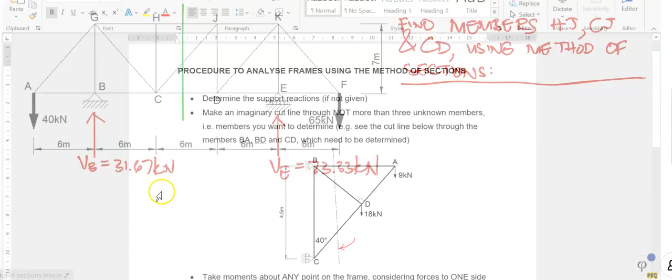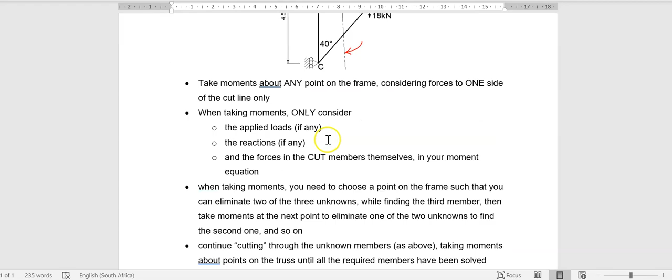Right. So what's the procedure? I'm referring to the procedure again. There's the procedure, if you get stuck. So for every member I'm going to solve, this is the procedure you go through. So what's the first part of the procedure? I'm going to assume HJ, CJ, and CD to be tension or compression. I am going to assume that HJ is in compression, and I'm going to assume CD to be in tension.

Now notice there, I'm drawing my arrows on the right side of the cut line only, because I'm going to consider forces to the right side only, so I don't confuse myself. And notice I'm only considering one end of the member. Don't put your arrows in on both sides of the member, on one side only. I'm going to consider forces on the right side of the cut line only, so I'm making my assumptions to the right of that cut line. If you put it on both sides, you will confuse yourself and get it wrong. So that's compression, that's tension, and I'm going to say that CJ is in tension as well.

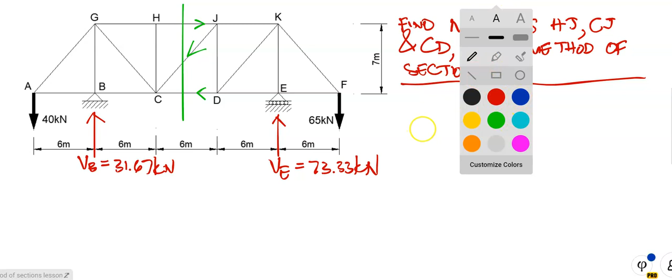So I am going to take moments about any point on the truss, considering forces to one side of the cut line only. So we need to take moments about the point which is going to eliminate 2 and find the third one. So I'm going to take moments about J for the start. So at joint J, I'm taking moments about this, considering forces to the right side of the cut there. So it's going to be plus 65. What's the lever arm for that one? It is 12 meters.

Minus 73.33 times 6. That's out of the equation. That's out of the equation. And that is in the equation. That will be plus because it's clockwise with respect to J. So it's plus CD. What's the lever arm? The lever arm for that force actually is the length of member JD, which is 7. Oh, that's an easy one. Are there any more? There's no more. Is equal to 0. Now remember the rules.

Remember the rules. Take moments about any point on the truss, considering forces to the one side of the cut line only. Only consider the applied loads, the reactions, and the forces in the members themselves. I'm not concerned with JK, DK, DE. So therefore, I'm going to write it here. So I'm going to say therefore CD is equal to, do the calculation yourself and check me out.

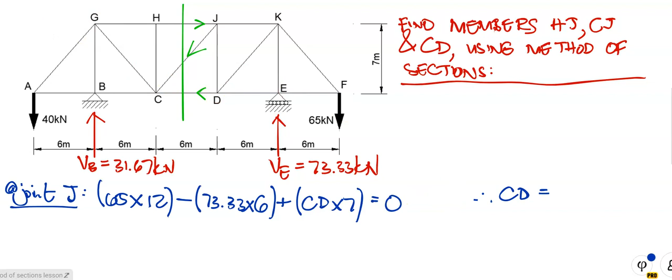And I got CD equal to, very important, minus 48.57. What does the minus sign mean? The minus sign means that CD is not in tension, it is actually in compression. So I'm going to change it. So it's actually doing that, and it's doing that. And I put both arrows in to tell myself I'm done with that one. So it is in compression. If you got that right like that, good start.

Right. I need to take moments about another point to determine either HJ or CD. I'm going to take moments about D. So I'm saying at joint D.

People, you can take the joints in any order. You can take moments where you want to, but I'm just happy to take it there. Okay, so if I take moments about D, is that going to be right? No, it's not going to be right. That's a bad choice. Why? Because CJ and HJ will be unknowns in my equation, so that's wrong. I shouldn't have taken that.

I'm going to take joint C rather. Yeah, that's a better one. Well, I'm taking moments about joint C, so that's out. I can determine HJ. So I'm taking moments about C, considering forces to the right side of the cut line there. Right, so let's see about C. HJ is going to be positive. So it's HJ

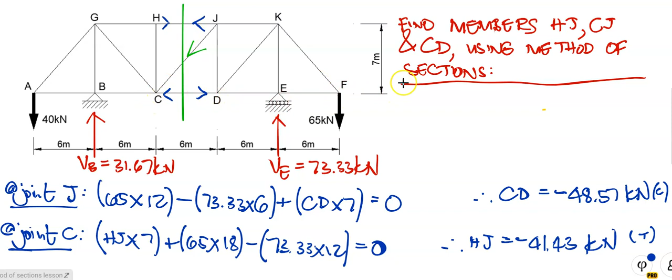Are we done? No, we need to still find member CJ. So we're going to take moments about a point which will help us to determine it. I can't take moments about there, I can't take moments about there, but I can take moments about H, or I can take moments about D to find CJ. Right, so let's do that over there. I'm going to take moments about D, at joint D.

Taking moments about there. So what's the rules? Take moments about any point on the truss, considering forces to one side of the cut line only. Okay, so I'm taking moments about D. That's in the equation, that's in the equation. CD is out, but notice here, I cannot determine that, and HJ needs to come into the equation too. Be very careful. A lot of students come here, they say, no, HJ is done, I can forget about it. No, you can't.

Right, so I'm doing the pluses first. Doesn't matter the order, just take all of them. So it's plus 73.33 times 12 minus VE. That's nonsense. That is not correct, I got the wrong one there. Silly me. Let me start again. Right, it's plus 65 times 12 minus 73.33, and that's a bit better, isn't it? Minus 73.33 times 6, because it's clockwise with respect to D.

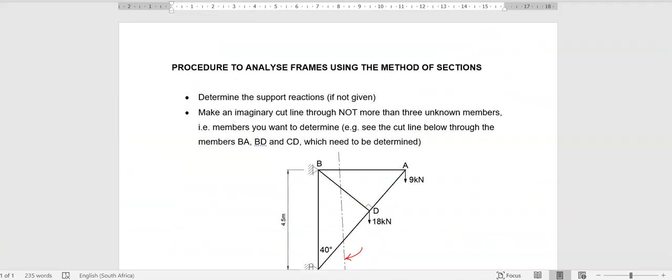So my guess in the beginning wasn't too bad actually, and because it's positive, it means that CJ is in fact a tension member, as I so correctly guesstimated at the beginning of it. Okay, so people, as I was saying, there's the procedure again. I worked to that whole procedure 3 times, once for each of the members there.

Okay, so HJ is 41.43 kilonewtons, it's in tension. CD is 48.57 kilonewtons, it's a compression member. And CJ is 10.97 kilonewtons, it's a tension member. Okay, so people, if you did the frame last year, and if you go back to your notes there, you can actually check that frame against all of that over there. And then I think I will actually just give you all the answers for that one, so you should actually go ahead and complete it.

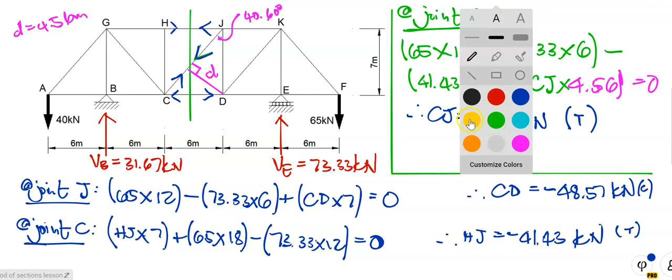Okay, so for example, if I want to find JK and DK and DE, I take a cut through there. If I want to find KF and EF, cut through there like so. If I want to find members KF and KE, I will take a cut through there. If I wanted to find members GA, GB and BC, I will take a cut through there, and so on. And you follow exactly the same procedure.

You assume tension or compression to one side of the cut. Then you take moments about any point on the truss, considering forces to one side of the cut line only. Normally consider forces to the smaller side, smaller meaning that we have less forces to consider. You only consider applied loads, reactions, and the forces in the members. And when you take moments about your points, always take forces.

For example, over here, I first took moments about J to eliminate those two to find that one. Then I took moments about here to eliminate those two to find this one. And then I took moments either about D or about H, but I chose D to find that one there, because now I know the other two. And if you take moments about point D, for example, I can determine this one, but HJ must still come into your equation. If you leave it out, that answer there is going to be wrong.

Okay, so people, all the frames I gave you to determine in method of joints, you take the same procedure for method of sections. You go back to your frames that I gave you in your method of joints, and you work through this and determine the forces in those frames, and you must get the same answers as you got in the method of joints. Okay, people, so that's the end of this lesson for method of sections.

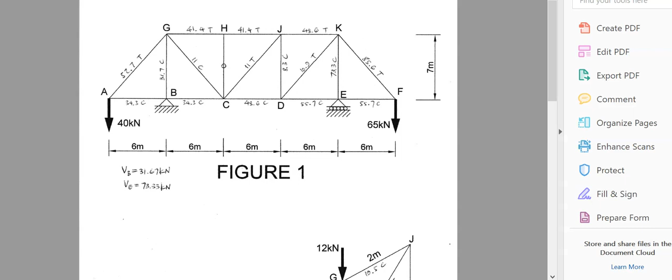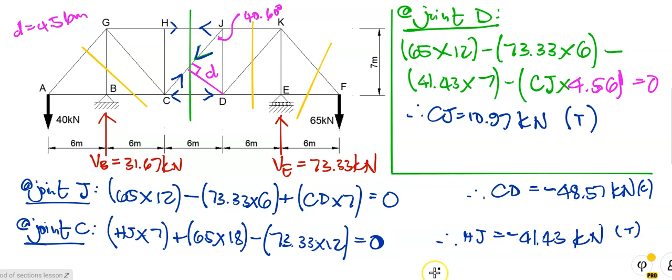Let me see if I can give you the answers for this one here, then you can work out the answers for the rest of this frame. Okay, if I go back to frames, there we go. There's the rest of the answers for that. There were the reactions which I used. There's member HJ, there's member CD. CD 48.57. Member CJ was 10.97. I just rounded off, so that's 11. And HJ, I got to be 41.43. It is 41.4, which is fine.

Okay, so people, there's the answers for that one. If you stop the video there, you can make a note of all. If you apply the method of sections to all the rest of the members in the frame, that's the answers you should get. That's the size of the answer. That's 41.4 kilonewtons. That's tension. The T stands for tension. The C stands for compression. Tension, compression, compression, tension. That's 0 there.

Anybody know what it is? The 0 just means that member HC is a redundant member. The force in there will be 0 kilonewtons or 0.0. It will be very, very small. It's actually negligible. It's got no load in it. Okay, so people, that's the answers for that frame. So continue with that frame. Take cuts through 2 or 3 unknowns at one time. Follow the procedure and see if you get the same answers.